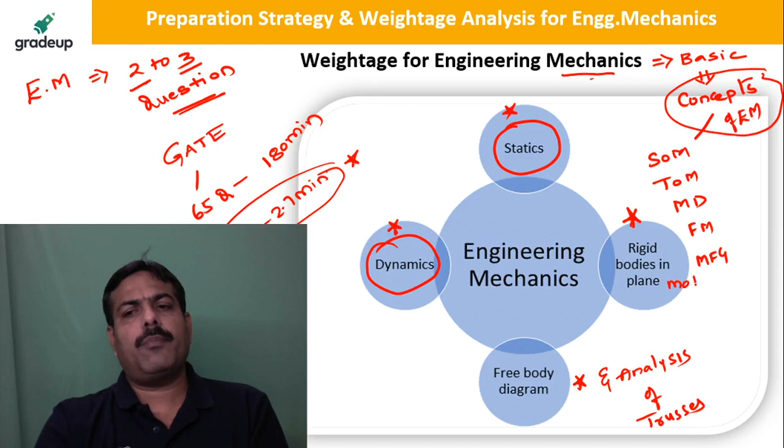In dynamics, mostly asked questions will be from rigid body in plane motion, which we also call general plane motion. This is a very important concept where every year you can expect one question on this topic, my dear friends. These are very, very important.

So I will tell you how much is the weightage of every topic and every subject in the last 10 to 12 years of GATE examination - what is the analysis - and then we'll go for the preparation strategy.

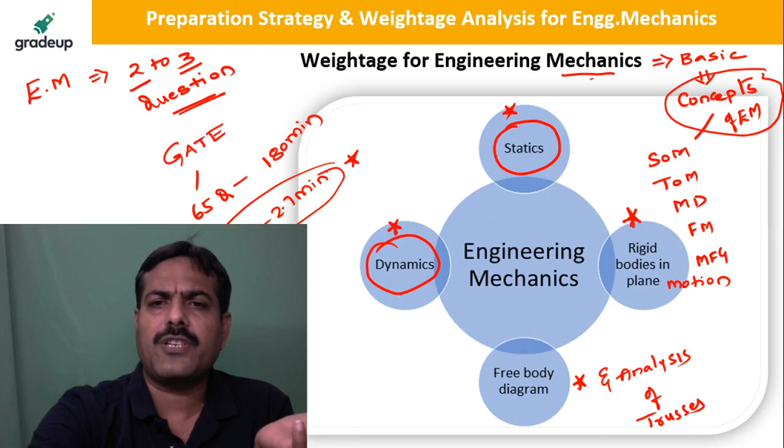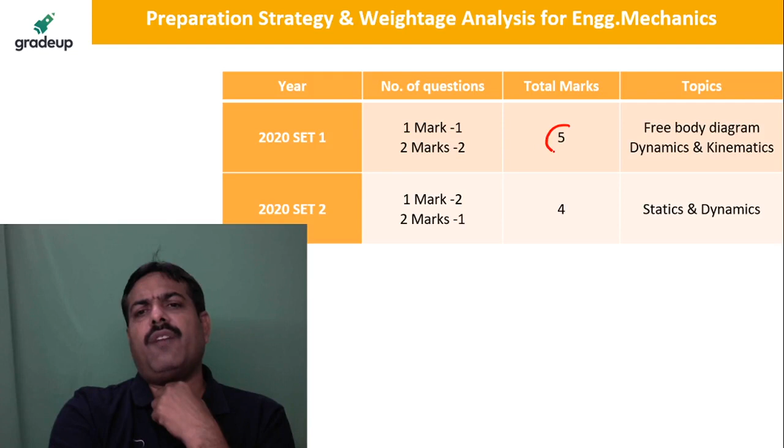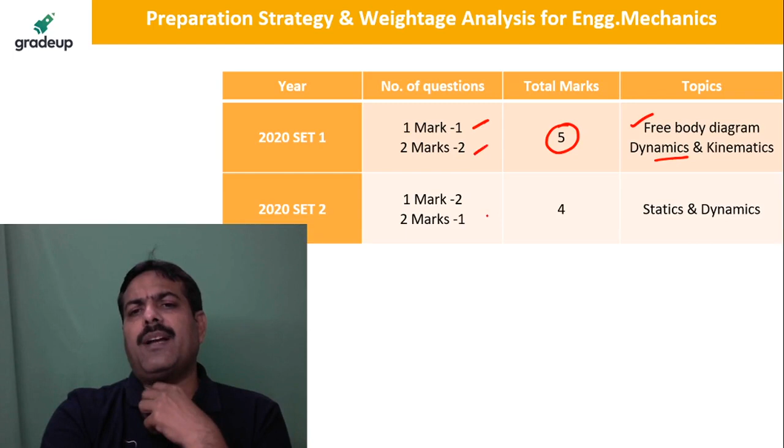So if I talk about 2020, you can see there are 5 marks which were from engineering mechanics, mostly from free body diagram and dynamics - the major contribution. You got one mark question and two marks question which gives you 5 marks. In set 2, there are 1 mark and 2 marks questions giving 4 marks, mostly from statics and dynamics, that is from free body diagram again.

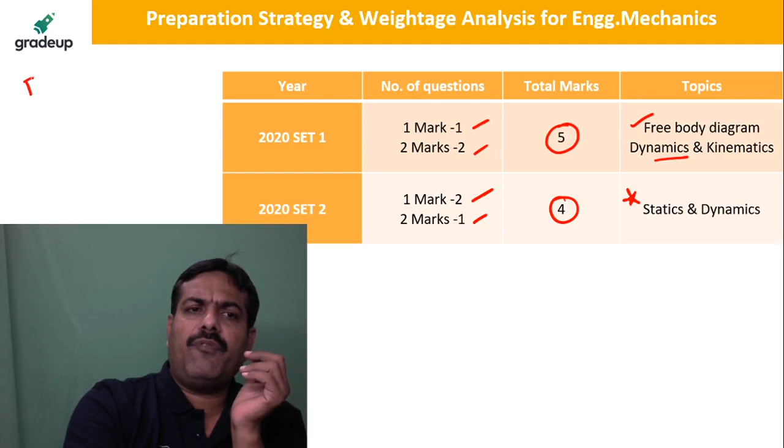So my dear friend, the major contribution is from free body diagram, which is very important, and trusses in statics. If I talk about the dynamics part, it is general plane motion which is there from dynamics.

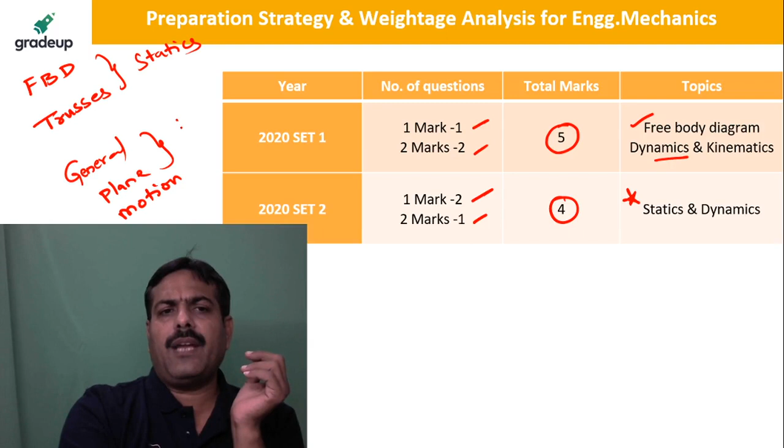So if you see the analysis of 2019, 18 and 17 - in 2019 set 1 there are 5 marks and in set 2 there are 3 marks. In 2018 you can see there are 4 marks. Now here you can see the highlight - in 2018 there were 7 marks which were from engineering mechanics.

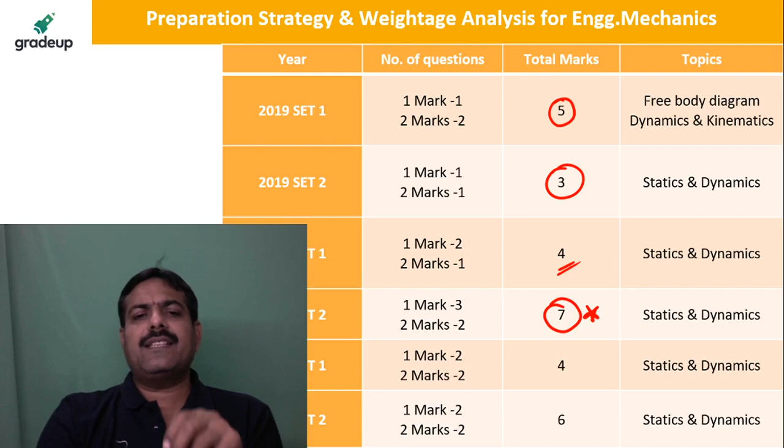So this is one of the very important years where you have seen that major contribution is from engineering mechanics. In 2017 set 1 there are 4 marks, and here you can see there is 6 marks again. In 2017 also it was a very good year where you can see around 6 marks were from engineering mechanics.

No, Ashwin. In morning session and afternoon session, there are 2 sessions in which the mechanical paper is being conducted. There are 2 papers in which the mechanical students are taking the examination. For example, in the February first week, maybe Saturday or Sunday, there will be a morning 10 o'clock session and afternoon there will be a 2 o'clock session. Is it clear now? Different students will be writing that examination. Single student will not be appearing for both the exams.

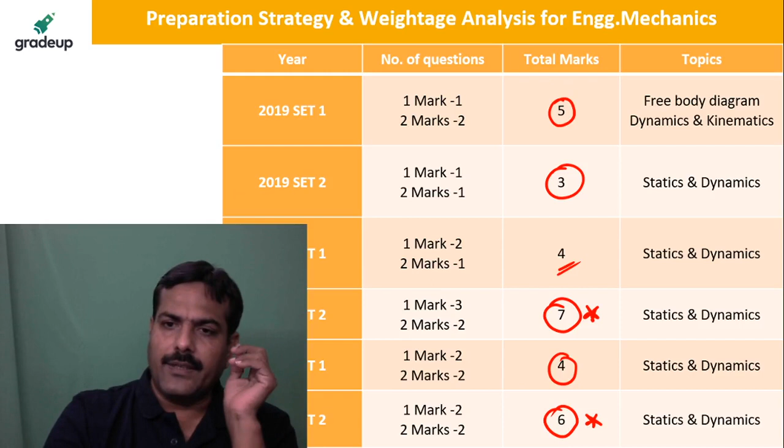So my dear friends, if you see the previous years 2016 set 1, set 2 and set 3, as the number of students in 2016 were more, it was being conducted 3 times. Means, for example, Saturday morning 10 o'clock, Saturday afternoon 2 o'clock and next Sunday morning 10 o'clock. Likewise set 1, set 2 and set 3 was being conducted where you can see that in set 1 there are 6 and in set 3 there are 7 marks. Whereas in set 2 you can see that we have got only 3 marks in 2016.

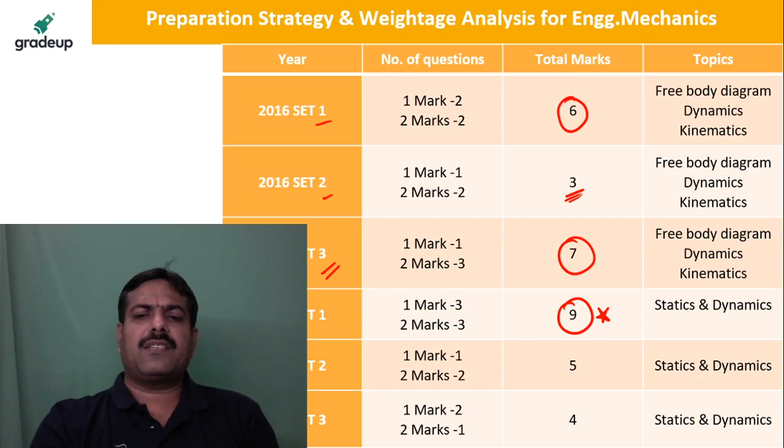Yes, Kumar, depending upon the number of mechanical aspirants being too high compared to other branches, it may be 2 sessions. Previously it was 3 sessions and in 2014 there were 4 sessions also, because that was the first year where multiple sessions were taken up here, my dear friends. Is it clear? Right. So in 2015 you see that the highest marks was 9 marks which was there in the complete 10 years of our GATE examination for engineering mechanics, my dear friends. Here you can see 5 marks and 4 marks in this.

If you see 2014, my dear friends, you can see there are 4 sets of paper. Means Saturday morning, Saturday afternoon, Sunday morning, Sunday afternoon. There were 4 sessions, my dear friends, and the maximum marks were 7, which was in set 4, my dear friends. Whereas you can see 6 marks were there, where 2 one-mark questions and 2 two-marks questions were there in set 1 and set 2, my dear friends. Whereas in set 3 there are only 3 marks which are being asked in 2014, my dear friend. This is what the analysis here.

And again I can say that the major contribution is from statics only, and that is from free body diagram and analysis of trusses, and in a few years we can see questions from friction also, my dear friends. 2013 there was only a single paper and we got only 3 marks and mostly from the dynamics part here. Here we can see that general plane motion was mostly asked. General plane motion was the question which was mostly asked. And along with that, one question was from friction also, I feel.

Now you see that in 2012 also there was only one paper, and this is what is the analysis. You can just see the analysis before 2012 also, my dear friends. So it was doubled here. So you can see that it has been doubled. No need to worry about this. So 2011 there are 5 marks, 2009 6 marks, 2010 4 marks. And now if you can see 2013, you have got around 3 marks which were being there in 2013, my dear friends.

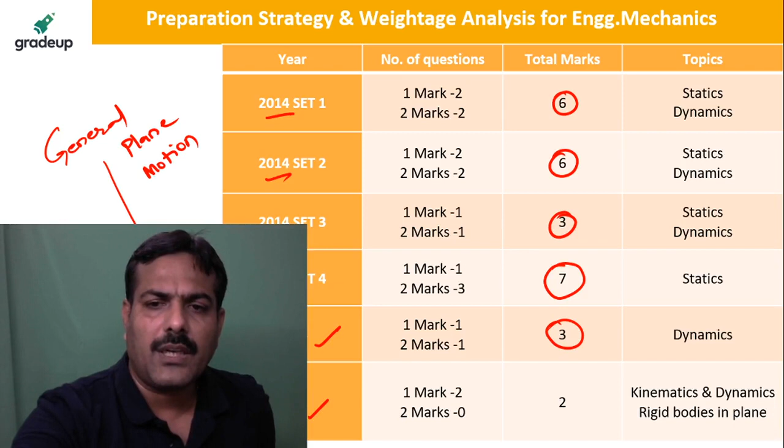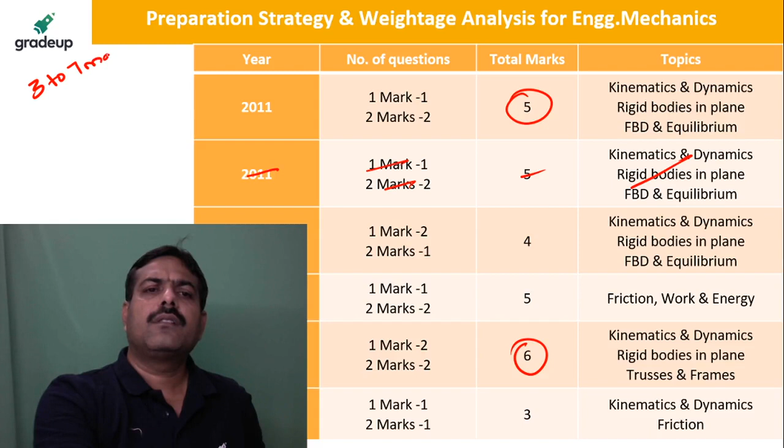So I think the analysis says that every year it varies from 3 to 7 marks. So on an average I can expect around 5 marks will be there from the engineering mechanics subject, EM. Is it clear now? And what I want to say here is that the major contribution will be from free body diagram, analysis of trusses, friction we need to focus on, and also we need to focus on the kinetics part, that is general plane motion of rigid bodies, and at last collision of elastic bodies. So very few questions were there on collision of elastic bodies, but there are some questions related to that also. Any doubt, my dear friend?

Yes, statics and dynamics are very, very important, my dear friends, and which will give you almost 80% of the engineering mechanics syllabus, my dear friends. Yes, any doubt, Ashwin, Kumar, is it okay? Now we'll see what is the strategy for solving this paper, my dear friends.

Very good, my dear friends, very good. Right.

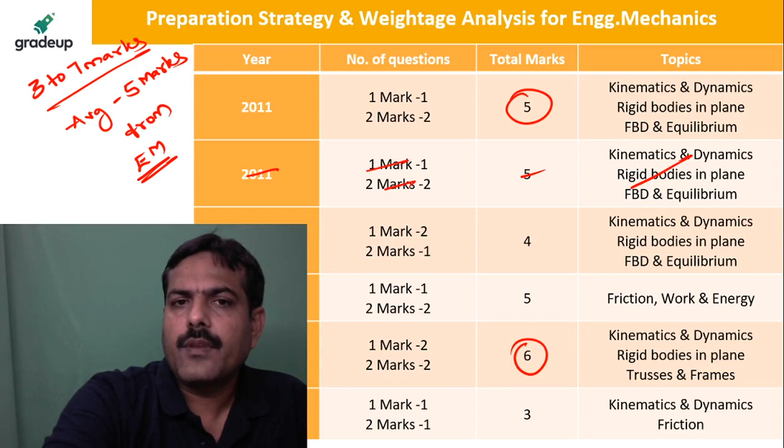So now what should be the strategy of solving this problem? The very important thing that we need to do as the first subject is engineering mechanics. You need to prepare engineering mechanics, because the concepts of this subject will be used in strength of material, theory of machine, machine design, fluid mechanics, and also in manufacturing.

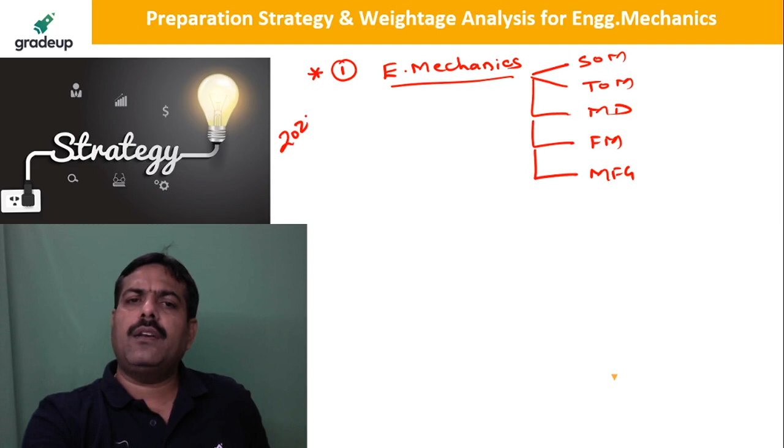Sir, whenever IITB has conducted GATE, the weightage of engineering mechanics increased. What can we expect? I can expect that in GATE 2021 the weightage will vary from 5 to 7 marks, my dear friends. That is what my analysis says, approximately 5 to 7 marks, Kumar, that we can get in 2021.

But the major important thing about engineering mechanics is that if you want to solve a problem in strength of material, theory of machine, machine design, or some topics in fluid and manufacturing, definitely you should have a thorough knowledge of engineering mechanics. That is what we need to do.

So my dear friends, the second important thing is prepare each and every topic of engineering mechanics, because all topics may not have a direct question, but there are some application questions where you require everything.

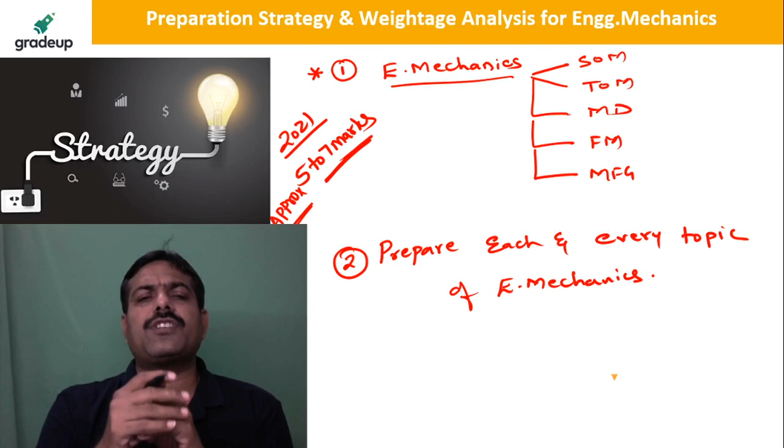For example, in GATE 2013, there was a question something like this, and the question was just finding out the reaction at point A. There was a vertical force applied here, and the weight of this rod AB is W. So the question was, if F is suddenly removed, then RA is equal to what? That was the question.

So generally we are very casual that since it is the reaction which is asked, and the weight of the bar is W, obviously RA will be W. Why? Because we don't focus on the fact that it is a hinge support at A.

And you see that if I draw the free body diagram of this, then you see that you will be getting RA acting up, W acting down, and there is a torque which is I alpha, which is contributing to the rotation of this bar.

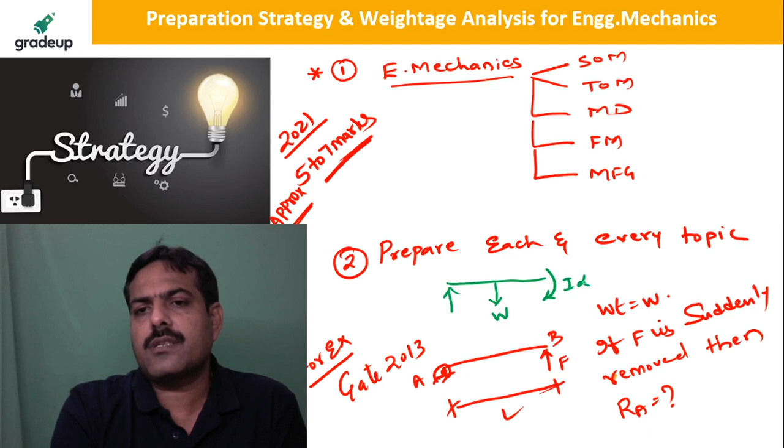Is it okay? So generally it is a dynamic question where RA is asked, my dear friends. So it is not just a static part, it is dynamic.

So what are the things that we need to understand in this problem? The very first thing that we need to understand is, right, the very first thing we should have is the statics part. We should know the moments of inertia.

Then only you can solve this problem, because I alpha is there. We should know the D'Alembert principle, that is the kinetics part. Then only you can solve this problem, my dear friends. So in order to solve a single question, we should know all the topics of engineering mechanics. Is it clear now?

That is what my aim here is, that whenever you prepare everything of this, don't leave any topic. Don't prepare like your university preparation, my dear friends.

Yes, Santosh Raj, what are the subjects you are going to handle in gear up and rank up? So Santosh, mostly I will be talking about engineering mechanics and machine design. If time permits, I will also talk on strength of material. Is it clear?

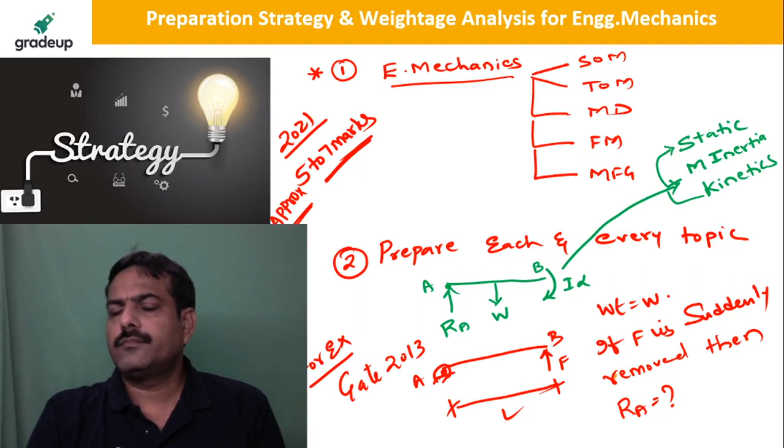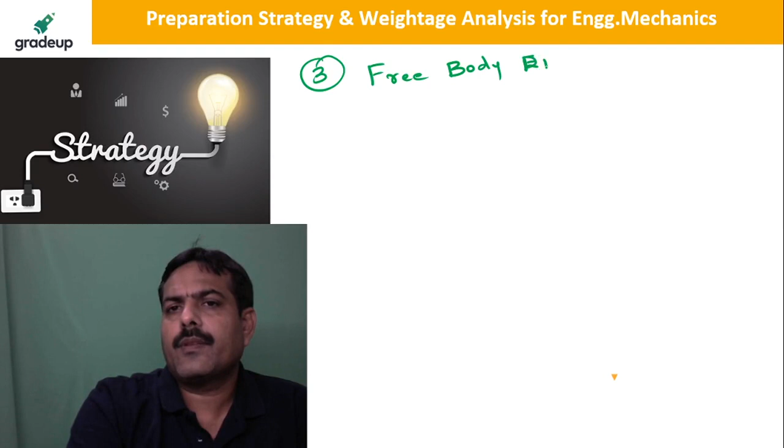Right. Any doubt in this, my dear friends? Now the third part here is that our focus should be on free body diagram, that is equilibrium. How to get a free body diagram? How to get a good grip on this free body diagram?

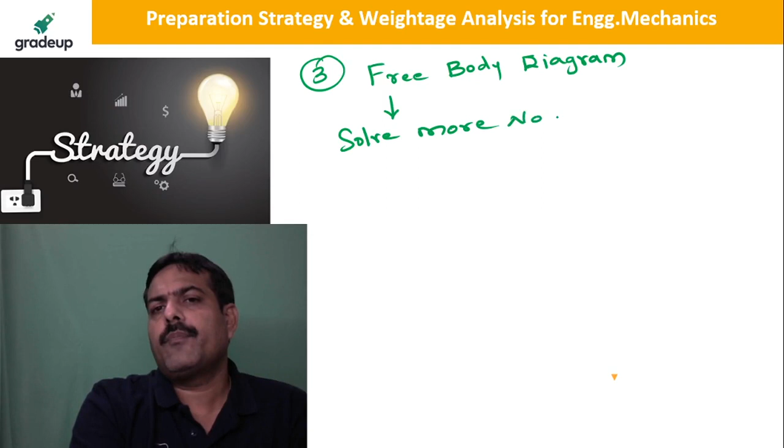Yes, my dear friends, can you tell me? As many number of practice problems you solve, you will get a good command on this. So solve more number of practice problems and questions. As I can very confidently say, the orientation of each and every problem in engineering mechanics will be different.

So how to solve the questions? My dear friends, you start the basics from your 11th and 12th standard physics textbook. Basics from 11th and 12th standard physics.

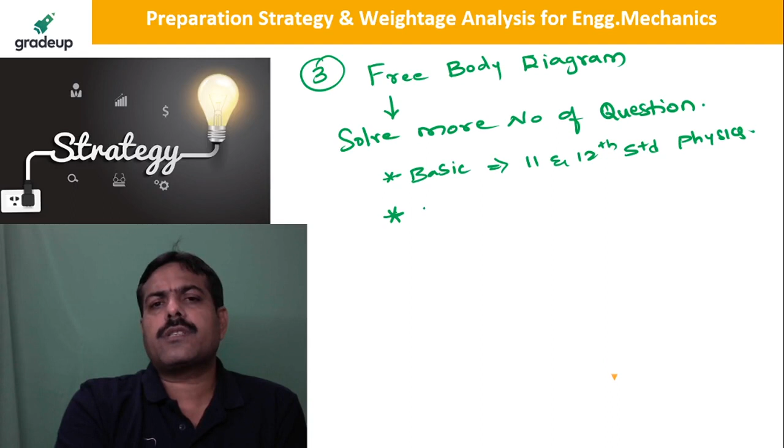That will give a very strong basics. If you are very good at that, definitely you can do engineering mechanics with very beautiful colors, my dear friends. And the next important thing is the good, standard books you follow

for problems. And the third important thing is our Rank Up GATE course. Our Rank Up GATE program will give you almost 3000 plus practice questions, my dear friends, so that it will be helpful for you, so you can see the varieties of questions which are there.

Is it clear, right? So this is what we need to do. And the fourth important thing is that most of the engineering mechanics questions

are concept based, and concept based questions are very important.

and mostly multiple choice questions, and you see that multiple select questions are also there. So your contribution for engineering mechanics will be mostly here. Why? Because there is negative marking in multiple choice questions. Is it okay, my dear friends?

Santosh, Ashwin, Kumar, clear?

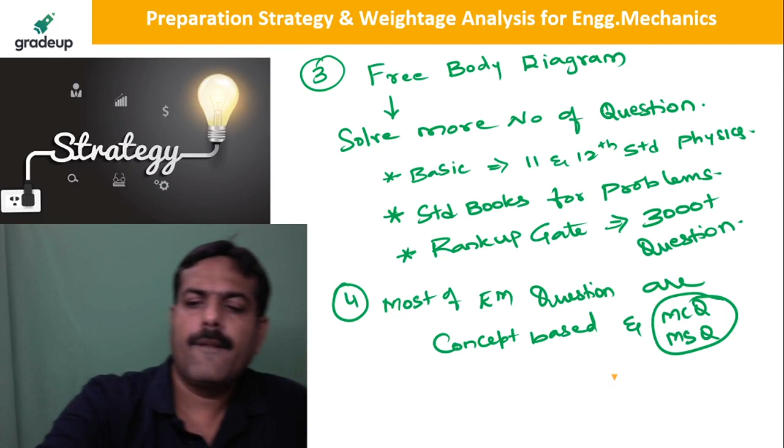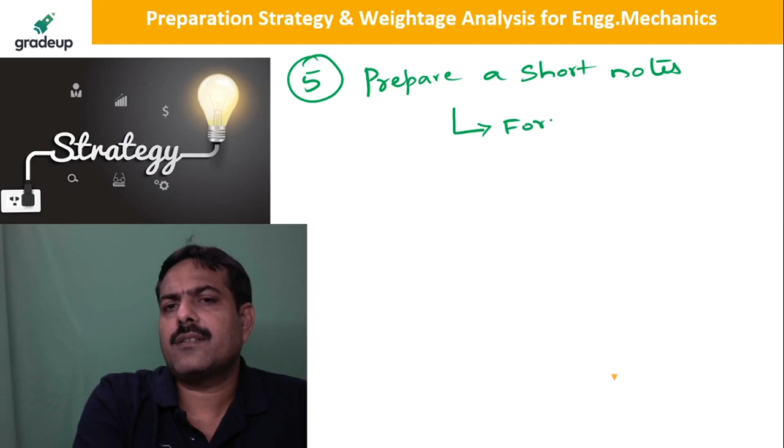Next important thing that we need to do is prepare a short notes which comprises of all the formulas, all the concepts, all the difficult questions.

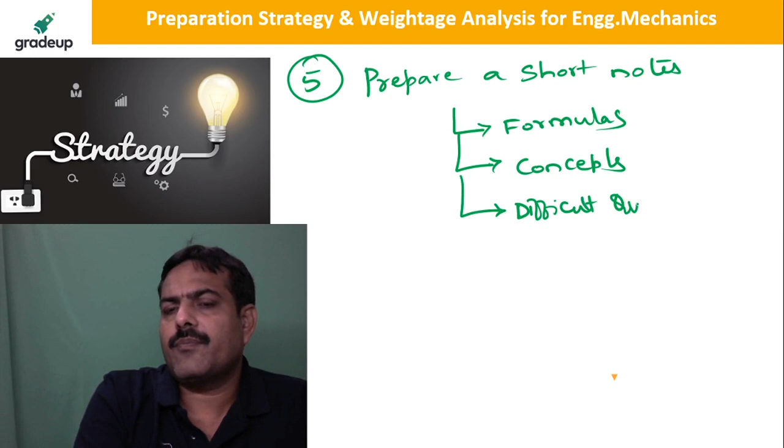So these are the things that we have to do in our short notes, and regularly revise this. Maybe in 15 days, maybe in 10 days, 1 month, you do this.

Why? Because from today, if I talk, today is September, October, November, December, and January - these are the 5 months left over for you, my dear friends. So in these 5 months, we need to prepare in such a way that we should remember the formula.

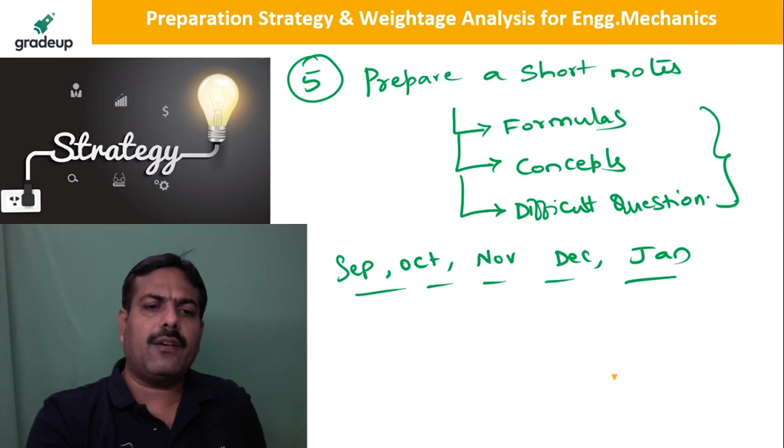How is it possible to remember the formula? Everybody is well aware of the moment of inertia of the rectangle. Yes, what is the moment of inertia of the rectangle, my dear friends? Moment of inertia of a rectangle. Yes, my dear friends, what is the moment of inertia of a rectangle?

Moment of inertia of a circle. Yes, for rectangle the moment of inertia is BD cubed by 12 - everybody knows this about XX. I know the moment of inertia of a circle, which is pi by 64 d to the power of 4. This also you know.

But if I ask you the moment of inertia of a parabola, it will take some time, my dear friends, because we are not using that parabola, ellipse and all those things on a regular basis. Rectangle and circle we are using regularly. That is the reason we know it.

That is what I am telling you, my dear friend. No need to mug up the formulas. You just write down the formulas in a separate notebook where you can see it regularly in an interval of 10 or 15 days, my dear friends. So in September you see it twice, October you see it twice, November you see it twice, December you see it twice, January you see it thrice, so that all the formulas will be there in your mind. Give highlighting colors, my dear friends, so that it will attract that formula very easily in your mind, so that whenever you require it, it will come very fastly, my dear friends. Same is the case with the concept, my dear friends.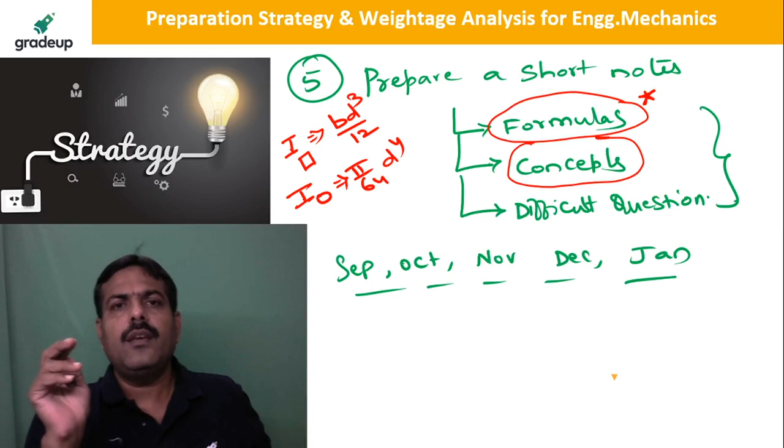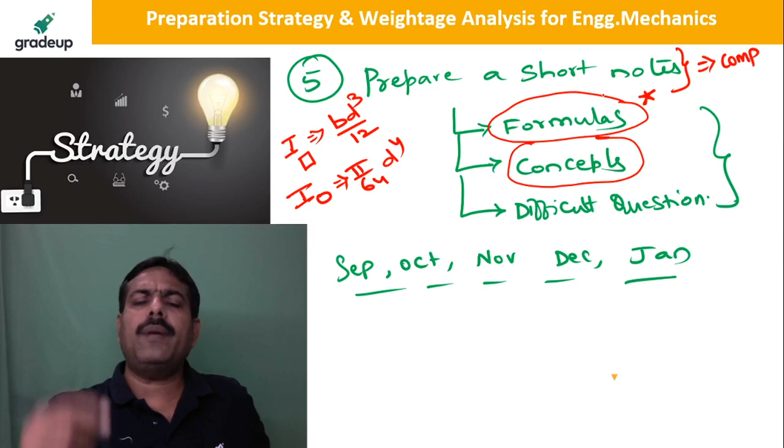Why? Because I will give engineering mechanics notes for 100 pages. You cannot every time refer to 100 pages. Your short note should be in such a way that if you prepare that, you should see the complete engineering mechanics. It should be in 10 pages or 15 pages, my dear friends.

And the last important thing is the difficult questions which you cannot solve in the very first attempt, my dear friends. That is what is very important. So, my dear friends, can you tell me the answer for this?

Suppose there is an arc, ABC is an arc. So there is a vertical loading here of 10 Newton. Now tell me, if I say that the reaction at point A is theta degree to the horizontal, what is theta? So generally this is a very concept-based question.

If you go on solving the problem, you will never get the answer this way. So my dear friends, if I draw the free body diagram at A, you see that A is subjected to only two forces. One is called Ra and the other is called F of AB. When can you say that it is in equilibrium? When both are equal in magnitude, opposite in direction, and pass through the same point. Is it okay?

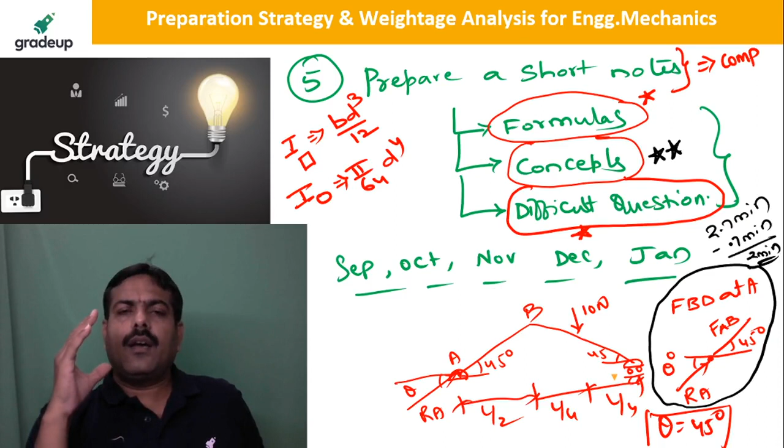But today, if I ask you a question about these angles, definitely very few people will be solving that, because you are handicapped with your calculator. Is it clear, my dear friend? Very good, my dear friends. Come on, cheer up.

Tirupati Raidu asked, Sir, is this the first class? No. Already a few subjects' analysis has been done. Engineering mechanics and machine design, I will be taking today and tomorrow. Any more doubts? Thank you, Santosh.

So these are facts that we don't realize and we go on doing this. Is it okay? Very good, my dear friends. Any doubts, you got it? Yes. Any questions?

So my dear friends, while practicing any subject, please use a virtual calculator if you want to solve the problem. Otherwise, go to your 12th standard approach, make your equations simpler and solve it easily. Why? Because the calculator you use in 4th year will solve the complete equation, whereas a virtual calculator will not do that.

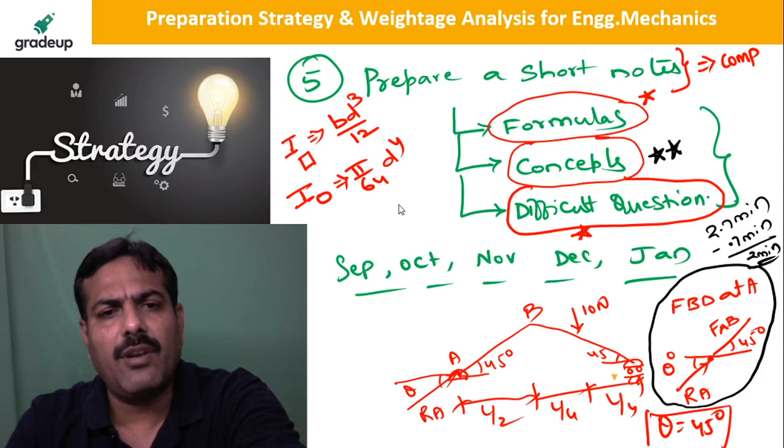So that is what I will talk about in the last slide - what are the good books we need to follow for our preparation. There are some standard books for good practice questions: a textbook by UC Jindal sir, Engineering Mechanics 4th edition by Bhavikatti, Introduction to Mechanics by Kleppner, Engineering Mechanics by Meriam, and Mechanics of Solids by Popov, which is also a good book for strength of materials.

So these are some good books to follow so that you get different varieties of questions and different concept-based questions. You have to use the formulas you've studied, revise your concepts, and solve application questions. Practice is very important, my dear friends. First, learn the subject in the right orientation - learn it in whatever orientation is required. Second, practice.

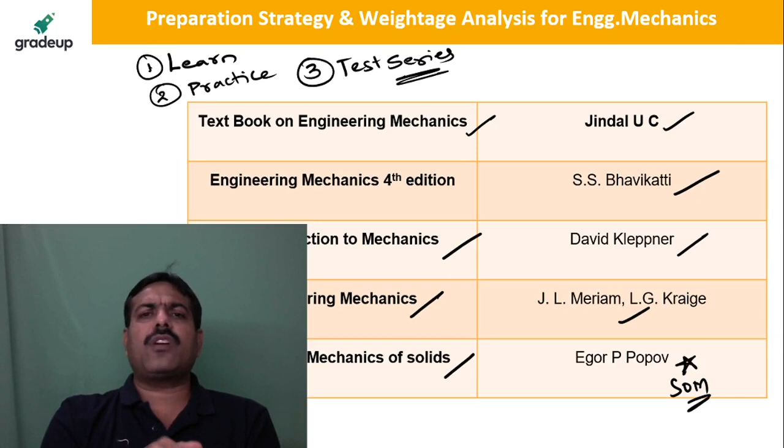And third is writing the test series, so that before the GATE examination you get a good grip on how the exam will be, how the questions are, and what are the possible areas where you are wasting your time. All those things you can see in the test series. But I have seen most students, after learning the subject and practicing, directly go and write the GATE examination without writing even one test. That is a blunder mistake you are making.

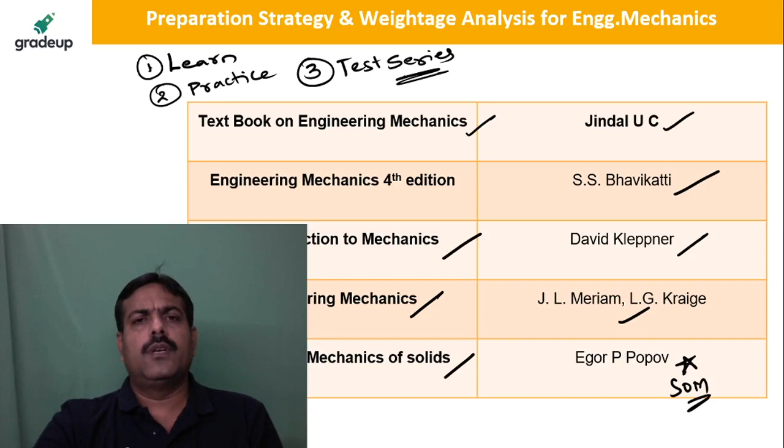My dear friends, please learn from your mistakes. Make a mistake notebook also, so that mistakes will not be repeated. That is what we need to do. Is it clear, everybody? If you don't have any more doubts, then I will take a leave.